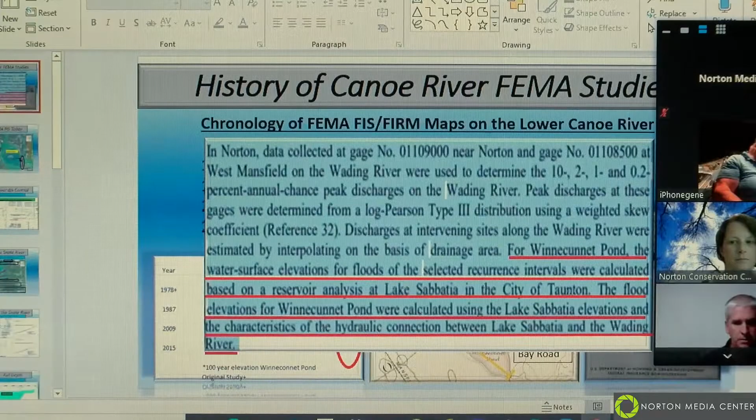Okay, can anybody see my screen yet? Yes. Yep. Okay, yeah, I've been living in Norton for 45 years. I'm retired. I started my professional career as a civil engineer in Boston, working with FEMA on the first flood insurance studies. After 25 years, I ended up with the National Weather Service in Norton, and I just retired a month and a half ago. Mark asked me to look at this, so I said, okay, let me look at the whole thing.

The first slide I'm looking at is a chronology of the lower Canoe River flood insurance mapping by FEMA from Bay Road up to Route 123. On your right here is a 1978 study done in 77 by Anderson Nichols in Boston. You'll find this on the internet. I had a copy of this along with a lot of other studies that were done back in the 70s. I was cleaning stuff out as I was retiring. I decided to keep this one. But if you look on the lower left here, 78 study, the Winneconnet 100-year elevation was 66.4 in the middle of the pond.

I have the update years, 1987, 2009, and 2015. There were no updates to the hydrology or the hydraulics from 78, but there was an update with the mapping and the datum change, 87, 2009, and 2015. So if you notice, there's a 7-foot increase in the 100-year elevation from 1978 study to the 87 study at Bay Road, Winneconnet, which goes all the way back at that elevation of 73.4.

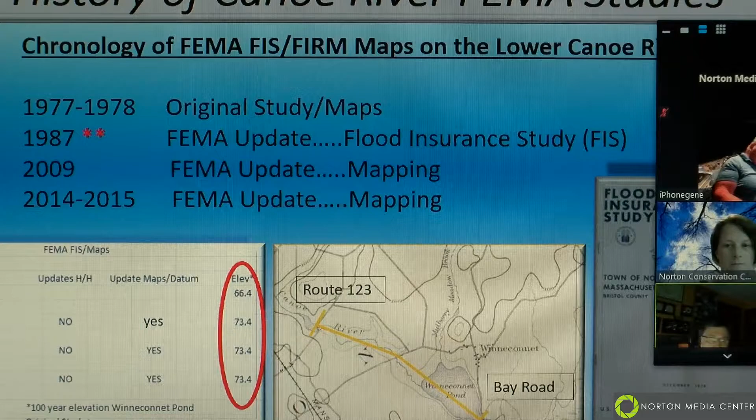So what I did is when I looked at this study in 87, it says for Winneconnet Pond, the water surface elevations for floods of the selected recurrence intervals, that's 10, 50, 100, and 500-year floods, was calculated based on a reservoir analysis of Lake Sabbatia and Winneconnet. What I found out is Lake Sabbatia rose 7 feet in the 1968 flood, which they called the 100-year flood, to almost elevation 66 down there. So it was a 7-foot rise.

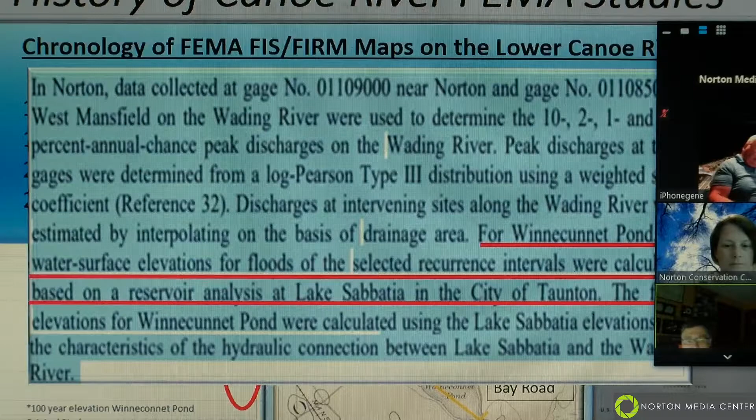I could not find any other information other than this. I tried to go to CDM and get the study in 87, but they couldn't find it. But the 7-foot rise there is similar to the 7-foot rise we have between the 78 study and the 87 study, from 66 to 73.4. So they're saying that there's a hydraulic connection between Sabbatia and Winneconnet.

I think what they meant was a hydrologic connection, because there's no hydraulic connection. There's Snake River, the Hockomock Swamp area downstream with Bay Road. So there's a hydraulic connection which is used in the flood insurance studies to date, right up till now, and I'll go over those.

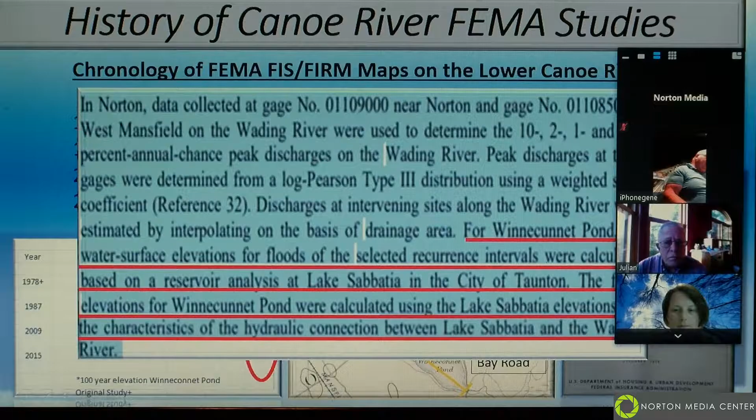This graph: when Mark came to me, I said, Mark, what you've got to do is get a profile of Bay Road, because the flood insurance study, the way it says today, has almost four football fields in length of water going over that road in the 100-year flood. So you've got to get me a survey of that road, plus other survey, and talk to some people there about the '55, '68, '98, 2005, and 2010 floods. See how high it went over the road.

So Mark did that, he got the survey, and I went to looking at the hydrology and hydraulics. So one area of concern here is the Bay Road culvert, because I could not find any hydraulic studies done on this culvert actually using the physical dimensions of it at all. I couldn't find it anywhere. It's not in any of the flood studies, because they started it there with a water surface elevation.

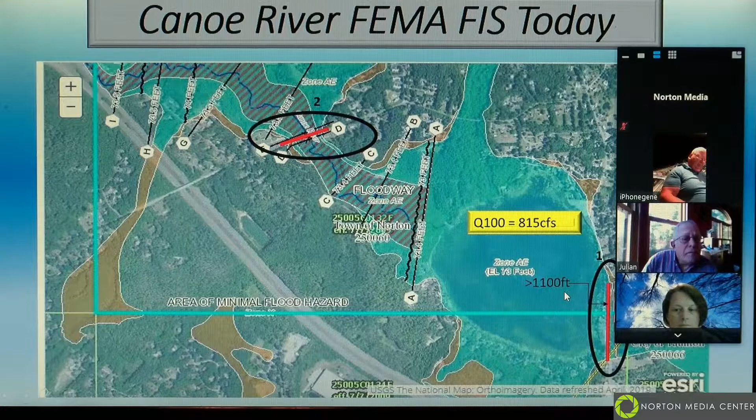And then the second thing is up here on Plain Street. There's a new culvert which can convey a lot more flow than the old one, the old triple culvert in there. So we had to look at that also as part of the study. So what I did is I went on a little bit of an investigation downstream, because I have to find out what's going on downstream to get myself a good starting water surface.

Snake River begins at the Bay Road. It goes down to Lake Sabbatia, and Mill River is downstream of Lake Sabbatia. So when I looked at the latest H&H studies, I went to MassDOT, and I got the I-495 study. And you can see here 66.7 is the NAVD 88 100-year elevation. And I went down to the new dam, because that's an even newer study in 2006 down in Sabbatia. 100-year elevation 64.9. You can see here in the graph, 64.9.

Interesting thing is the half PMF peak, 67 feet. Half PMF is from the half PMP, probable maximum precip, and in one day that's 17 inches. The full PMP is 33.5 inches of rain for that watershed. So the half PMP is 17 inches, and that gets the elevation to 67 feet. The reason why I'm looking at all this downstream is because that's such a flat basin. From Sabbatia spillway back to the Bay Road, there's no change in elevation, about 59.5, 60 feet. It's flat as anything. So I'm trying to figure out how we get a 7-foot rise in elevation of the 100-year flood from down that area.

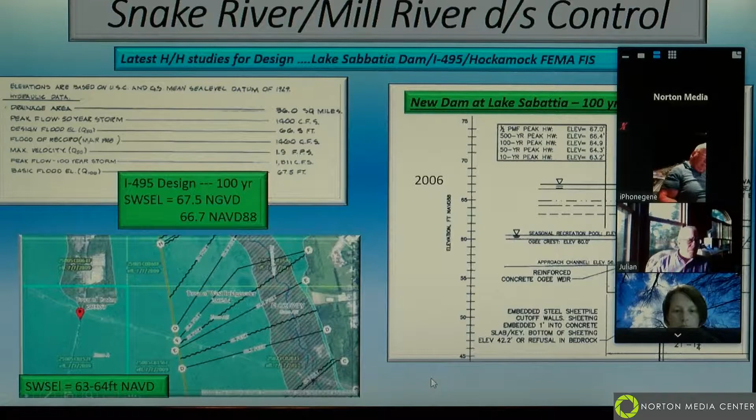And the other thing is, you go to Toad Island Road and you walk into the woods, into the Hockomock Swamp. You go northeast, east, and then you come out about 4 miles later at the Hockomock Brook, and that elevation for the 100-year is between 63 and 64 feet, which is the lower left. So investigating all these things, this is what I came up with. The new dam at the outlet of Sabbatia has 64.9 NAVD 100-year. FEMA 100-year, right here at Field Street, is 65 feet. The MassDOT 100-year is 66.7 NAVD.

This is how I started the HEC-RAS Corps of Engineers model. I started at 66.7 feet. And we got a bunch of cross sections through LIDAR and survey. And I'm trying to come up with how we got this elevation of 73.4 here, which is 7 feet over the previous elevation, and it's much higher than these elevations that are controlling downstream. And then the FEMA 100-year up here in Hockomock is 64. So we're in the 60s everywhere with the 100-year. I know I'm going through this quickly, but I also realize I don't have much time to do this.

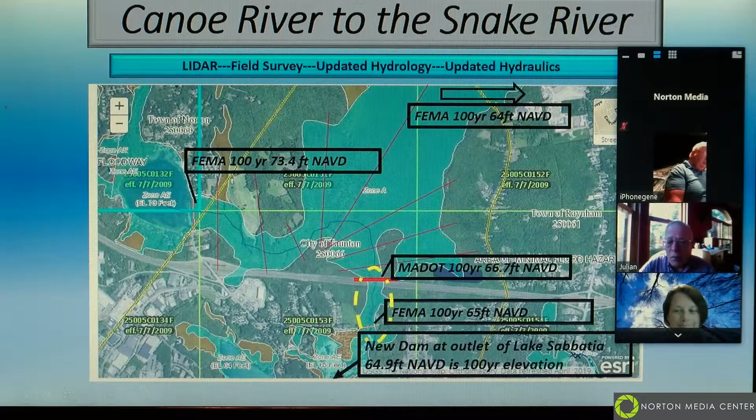So as we got LIDAR and field survey, we updated the hydrology and updated the hydraulics. The hydrology on the upper right: they used the Wading River peak flows for 1926 to 1977, using log Pearson Type 3. They took those flows and transposed them to the Canoe River Basin based on the difference in drainage area to the 0.72 power.

So because none of the studies updated any of this stuff, I used the new FEMA methodology, the multiple Grubbs-Beck statistical analysis, and I used 1926 to 2019 to come up with a flow. And the flow is bigger, which it should be, because there are some climate change issues with more rainfall falling. We also, in the lower middle here, had survey done on the bridge and the opening at Bay Road.

And then we also looked at the new culvert here on Plain Street, a little bit of drawing in. That's the new culvert, I did that kind of quick, but that's the new culvert as far as the conveyance. The old 3-barreled chamber, really you couldn't put too much in there. And if you looked at the flood study, you couldn't see how this thing was really working because you started with this 100-year elevation of 73.4, so this thing was always submerged.

But if you take it to the 66, you can look at how this culvert system would have worked, and it's not good at all, the old culverts. You would have been over top on the road in the 100-year. But now we've opened this thing up, so we got a bridge there, and it can convey a lot more water. So one of the reasons why I'm mentioning this is because anything upstream of Plain Street with the old bridge, you could have some flooding issues further up on Leonard, like in 2005, because this Plain Street was a real bottleneck also.

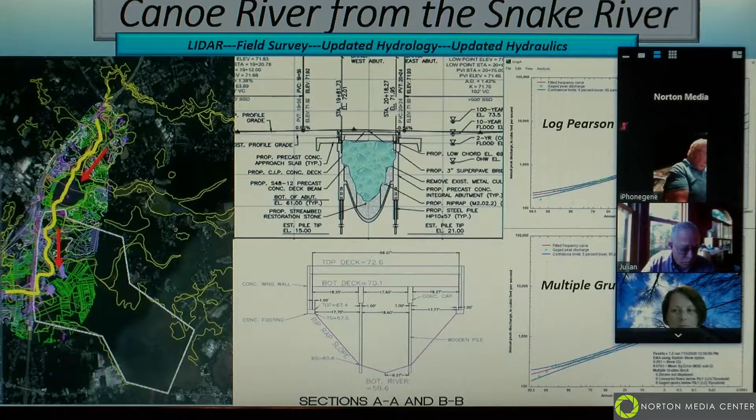So what I'm showing you here is the flood profile developed for the HEC-RAS model from I-495 up to almost 123 here on the right. And I used the 66.7 to start this at the 495 bridge 100-year. And we put cross sections in it, and we put the structures in, and ran the new hydrology based on FEMA's flood studies from the old hydrology, put the new hydrology.

And I didn't go over this, but this 100 is the new number, 871. The old numbers, which I skipped, were 815. That was the old 100-year number. Those numbers were even used in the Plain Street Bridge, but none of the hydrology has ever been updated. So I figured I'd update it to get some more realistic flows in here. The red line on the bottom is where no detailed FEMA hydraulic model was done from Bay Road downstream to the Hockomock Swamp into Snake River down to 495.

This line right here, that's the 100-year current line that's been there since '87, which is the legal line, which everybody has used because that's the FEMA line. That's the one that has to be used. But that's where it is. It's overtopping Bay Road. It's overtopping Plain Street. And when we did the hydraulics and the hydrology based on the new configuration here, we're coming up with a lower number. Very similar to the '78 study.

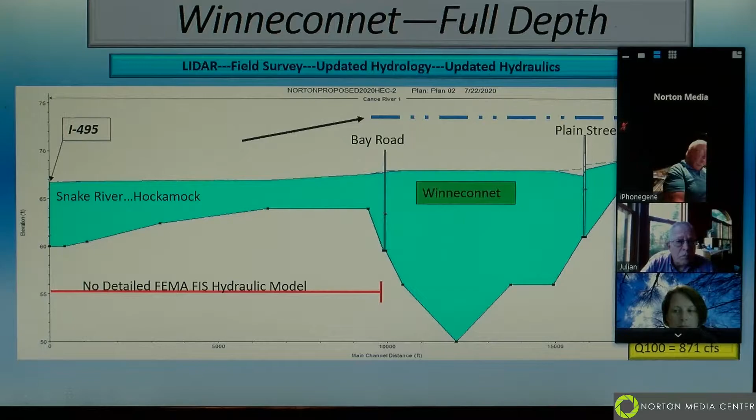So this map has a lot of information on it. But basically what I'm trying to do is I'm showing you the HEC-RAS profile of Bay Road. Over here on the left is I-495. Way up to the right is Chateau, but it's off the map. And I'm showing these storms, '55, '68, '98, 2005, 2010. They're the largest storms in the area in the modern time. They're the closest to the 100-year.

If you look at these flows transposed here on the left, these are the flows that were transposed from the Wading River annual peaks with drainage area to a power, converted to what the Canoe River would have for flows, according to the FEMA flood study in '78, which all these other flood studies have been based on. So I just updated it. But what we did is we used 871 for the 100-year. And the interesting thing is Canoe River had a gauge there. In 2010, they measured 800. It's close, but this other value is taken from another basin, the Wading River Basin next door.

So what I wanted to show you here is the blue line is where the HEC-RAS model comes, starting down at 66.7 at I-495. This is how high it comes, up to about 69 feet. And I'm showing this level, this is what it comes up to using the 871 100-year flood hydrology in the HEC-RAS model. I also went back and looked at 1998 because we are hearing that was a higher flood, and I'll show you why in a minute. But when we run that level, starting at 69 elevation down there at the bridge at 495, we come up and we overtop the road a little bit for a very small area.

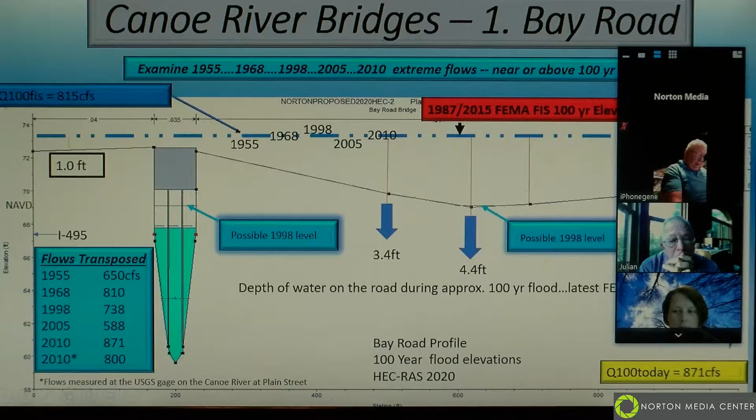So I wanted to tell you about the '98 flood because that was a unique flood that happened in June, and I call it the Great Flood of 1998 for the Canoe River. The basin here, we had nearly 10 inches of water, and I've kept a co-op site in Norton for 45 years, and I reanalyzed the data of that rainfall because I remember when that happened, that was a hell of a lot of rain. And we got 7.61 inches in 24 hours,

but it really fell in a much shorter time than that. So if we look at the TP40 Atlas for '98, when the TP40 Atlas was in vogue for this river, 1998 return period, the rainfall was all over the 100-year event. But if we look at the current Atlas, only the 6-hour and 12-hour rainfalls were near the 100-year event. The Wading River that this is compared to is just to the west or left of this drawing, so they didn't get the big-time rain.

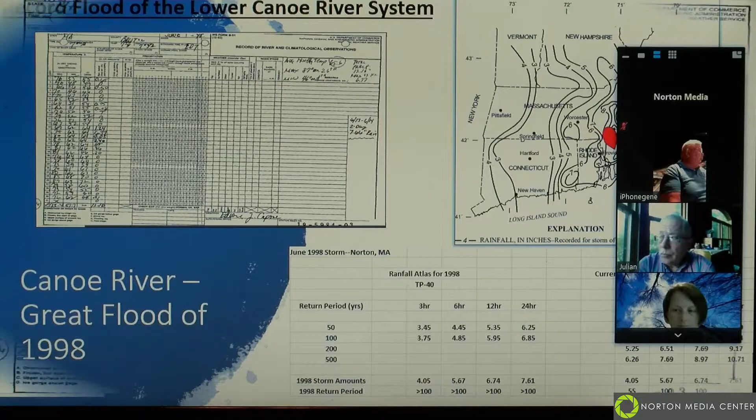So you know where you're going to transpose the flows that fell on the Canoe River from the Wading in that type of event, because this was a real tight gradient event, and it basically centered itself on the Canoe River. So I'm saying that was a greater than 100-year event, and I'll tell you why. 7.66 inches of rain in less than 24 hours. About the time when maximum flow got down to Winneconnet, which was probably 24 to 40 hours later, we got another 2.4 inches of rain.

So this is from data in the basin. I live in the east part of Norton, but I'm in the basin. So I get nearly 10 inches of rain in a little over 2 days. So it was quite an event. We understood from one of the presentations that there was a little bit of flow over the road in that event. So I reran the river system based on what I thought fell in the 1998 event.

I went to the Taunton Flood District's meeting notes, and they're saying that anything north of Field Street to the border of Norton, that whole Hockomock area, that is at or below 69 feet, there's an issue with it. And I couldn't talk to anybody to find out what the issue was, but it must be flooding. Anyway, I started the run down on I-495 at 69 feet. And sure enough, it came up through Bay Road, and it came up to the parking lot on, I used to call it Ann's Place, Chateau. The parking lot had water on it.

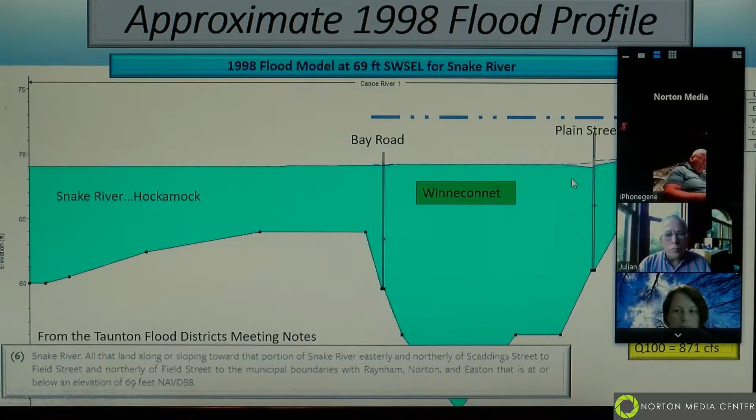And Plain Street with the hydraulics, it's running much better than it would have with the old hydraulic system and the bridge system. So when we go up to Plain Street, if we look at the 100-year 871 CFS with this hydraulic configuration of the new roadway, this is what it does. It keeps much of it under the low point of the bridge. The old 73.4, I don't care what you had in there for a bridge, you're going to be overtopping it. And that's what the flood insurance study says, and that's legally by law the 100-year floodplain.

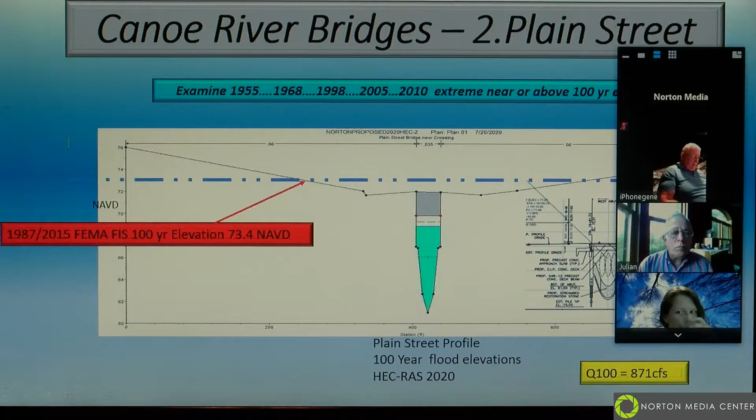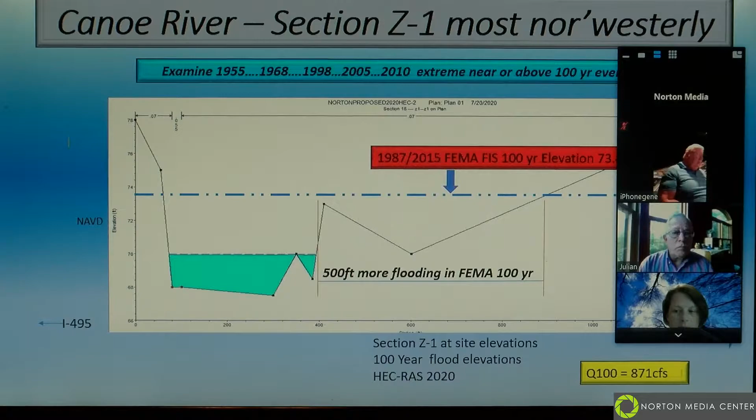And if you go up further, closer to 123, this is section Z1. Maybe you have this on a map, Mark, but this one here is changing the 100-year floodplain from 73.4 to about 70 feet NAVD, which changes laterally 500 feet of floodplain in that area. This is a major change in not only elevation, but also in the lateral extent. Oh, Mark, you want to talk about the map?

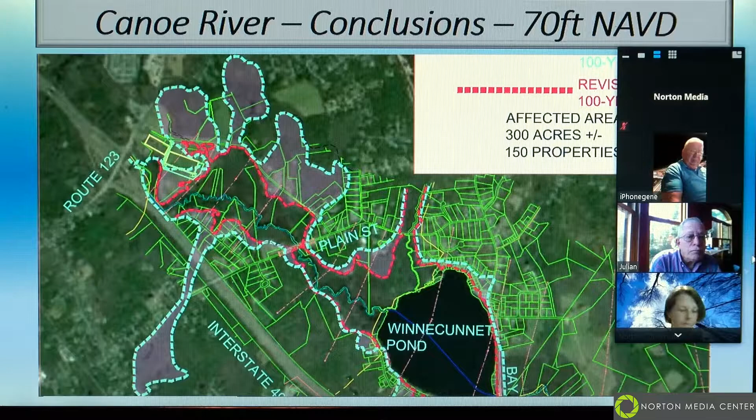Okay, go to the next one, so we'll go over the conclusions. The model you looked at has updated hydrology based on the earlier FEMA flood insurance studies up to 2019 with the peak flows. I used the Corps of Engineers HEC-2 model and retrieved that and converted it to HEC-RAS to make sure I had a good existing model and I had the flood insurance study correct with that.

Then we used a new HEC-RAS model because we had to extend the downstream down to the Snake River, down to 495 and maybe even further down. But it has new improved hydraulics at Plain Street, and it has the hydraulic modeling of Bay Road, which I haven't been able to find anywhere in any of the studies, or even outside of the studies. And I reviewed all the downstream hydraulic controls of the Snake River. And of course, we have this new profile.

The result is I have more water in the system than any of the other flood studies, and I have a lower floodplain by 3 to 3.4 feet for the 100-year. So if we were to go in front of FEMA, it's a long process. The letter of map revision and the conditional letter of map revision process and MT-2 application would have to go in front of them to show them the changes of the floodplains, the floodways, and all the elevations. And then they have this PMR, physical map revision, which we can get into later.

The one thing I didn't include is I-495 and Field Street hydraulics in the model. I kind of looked at the flatness of it, and I can't see how I'm going to get 7 feet, or how I'm going to fill that Hockomock Swamp up 7 feet more to get it up to 73.4.

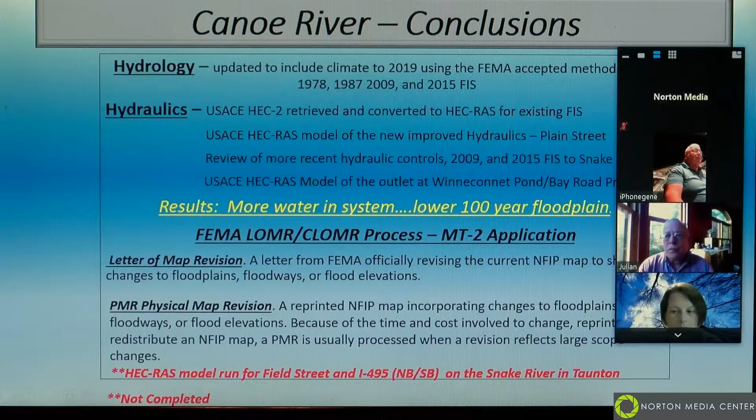So the MT-2, basically, it's a long process with FEMA. A technical review of the H&H is required. The FIRM and FIS have to be updated. The special flood hazard areas would change. It'd be a change in, I guess, requiring mandatory flood insurance, but anybody could still keep their flood insurance, and the maps would change.

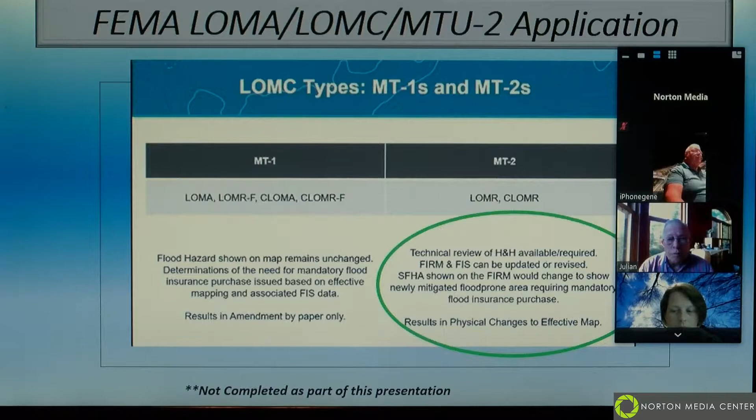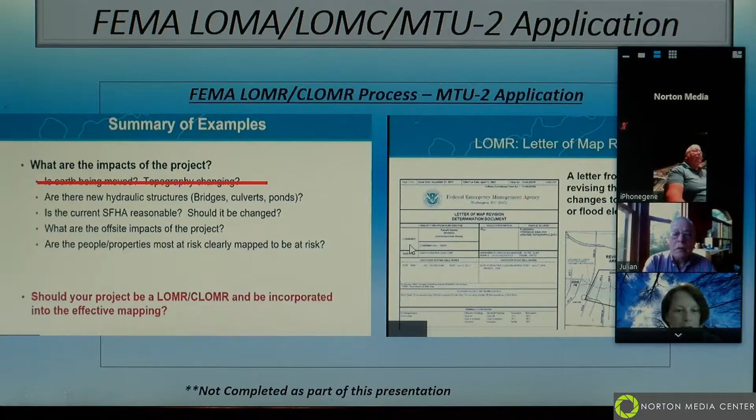All right. So if I was to submit something, there's an awful lot of information that still has to be done with floodplains and floodways, the way FEMA would like to look at it, so it would even have a chance of being accepted. But I have my certified floodplain manager's certificate I've had for 12 years. And the reason why I'm looking at this is FEMA is very happy to change mapping if they think something is wrong. No one's ever looked at this. No one's ever complained about it. I had Mark come up to me, so I said, oh, okay, I'll look at it, because he was telling me you don't think the water could be that high.

So this is not something FEMA would say we're not going to look at, because they want better mapping. If we can find a way with better technical information to give them better mapping, this is a start for it. That's all I did. This is a start for changing of mapping. The town of Norton does not have to do anything different with the FEMA regulations that are there now. This could take, I don't know, 6 months to 2 years to change, if it gets changed at all. So just showing you some information.

Well, as I mentioned at the presentation at the selectmen's meeting, this really is not something that can change our process until the map changes. So you're mentioning that it's a big package, but I'm assuming if you put this amount of information in front of them to show that there appears to have been a typo in the transcription between 78 and 87, that they will look at it and potentially fill in the missing pieces in order to make the revision.

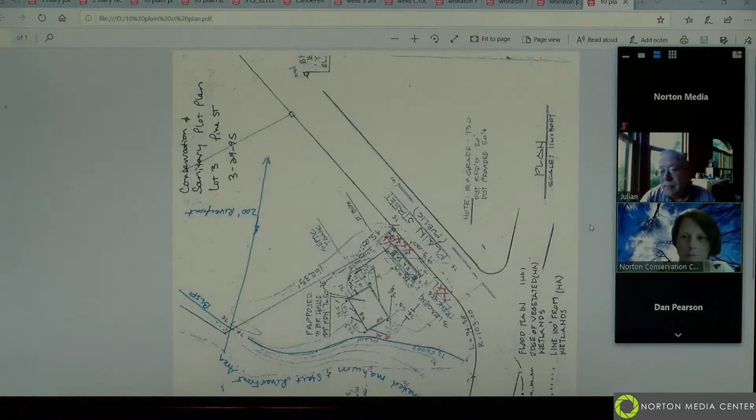Hi, good evening. This is Debbie and John Poplowski from 10 Plain Street. We are here tonight to get approval to have pine trees removed from our property, 18 in fact. All of them are old, but many have died. We've actually lost a couple in the last 6 to 8 months, the latest being just a week and a half ago, where it went right through our roof.

All right, just 1 second. Jennifer, is there any way you can enlarge that a little? I can enlarge it. I can't turn it sideways though. Is that better? Yeah. So up here is Plain Street, and this is Pine Street. I just drew X's in there. It's in that area, and I have some photos to show. I'm not sure if Deborah has anything else she wants to add before we look at the photos. No, I don't think so.

So there are 2 groups adjacent to the street, and then there's one couple that are adjacent to a creek back there. Is that right? A river. Well, Rumford River. It's far back. It would be the outer riparian, if anything. Yeah.

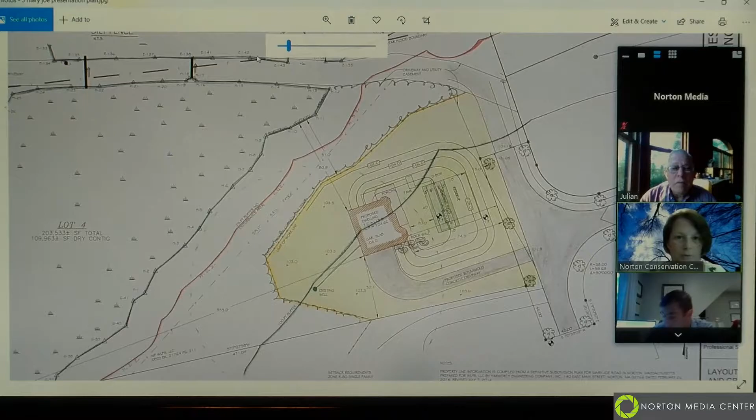I do have some photos if you want to see, for members. And while those are being posted, to take a minute, any other questions about the project from members of the commission? And if not, I'm going to look for hands up. Oh, I just had a quick question, Julian. Yeah. So you mentioned the silt fence is already there, was installed. What's the integrity of that silt fence, and how old is it? I just want to see if it's here. Okay. It's not bad. The fence is okay. Yep. Okay. So I'll just go back to the beginning here.

So this is as you come in the driveway from the road. You can see it's already cleared. And I think this is where the foundation will go, and up here is the septic system. This is full of Japanese knotweed. The sediment control in the front probably needs to be redone. And that is the existing well with the existing fence. And this is the post with an old marker, but it's not consistent with the markers that we give out. And it's not a post and rail fence.

Well, sorry, quick question. Will the post and rail fence go along the erosion control line? Correct. Okay. Yep. What about where it turns and is outside of the buffer zone? Would it stop at the 100-foot buffer zone? Or can it stop there? Let me see if I can pull that plan up again for you. What's this plan? You mean down here near the well? Yeah. Mm-hmm. That depends on what Natural Heritage says. But for our purposes, yes, unless Natural Heritage says it goes the whole length. Okay.

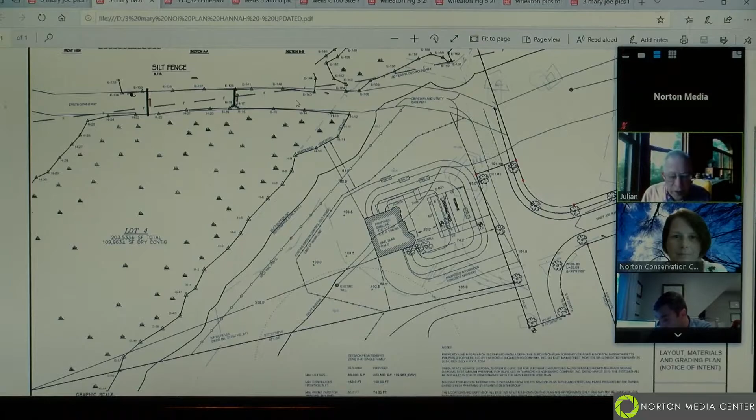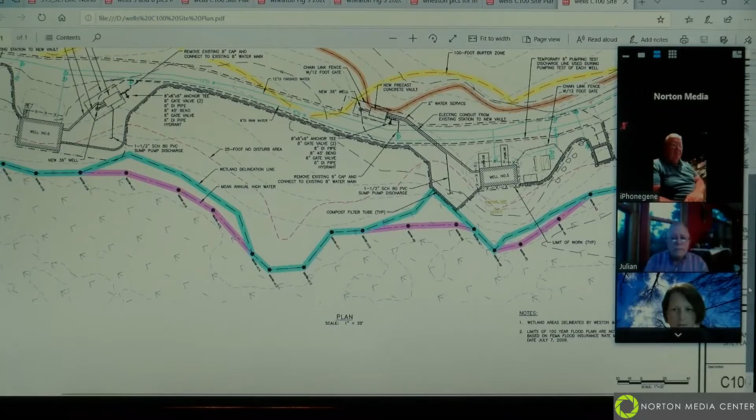Okay, the next question is, you've provided a detail in the narrative that's called the discharge detail. And then you provide a detail on the plan set that's a little different. Looks like it's supposed to be the same thing. So, could you just explain the difference between those two things? I'd have to see what you're talking about. Sorry. Okay. Well, you can have that answer for next time. The very last page of your narrative, Appendix H, discharge dissipation, has a discharge detail. That differs from the detail you're showing on the detail sheet. So if you could tell us what the difference is at the next hearing.

The next question I have is the sediment control. How come it doesn't wrap around the back side of those wells, or the north side of those wells, between the physical work and the resource area? It seems to stop at the fence, which is not even going to be there at that moment.

So what are you requesting? I'm asking you why the silt fence doesn't go behind the well. If the work is going to be performed there, that silt fence should be between the disturbance and the resource area. So why stop at the edge of the well? Well, is the well a building, a concrete block building or other? Are you talking about right here, Lisa? Yes. Yeah, it's a building.

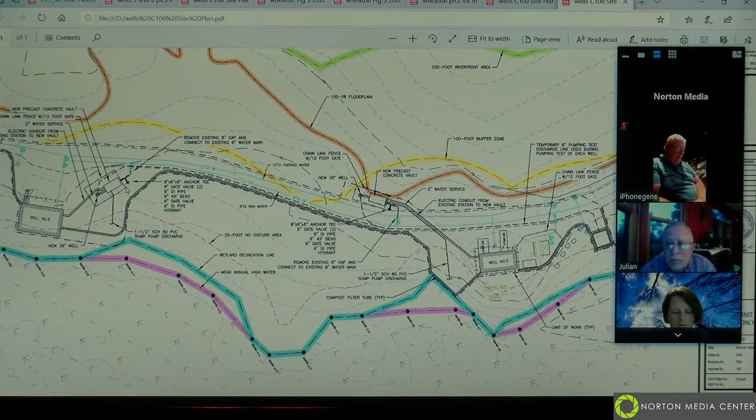So my question is, how often will that operate? If you need velocity dissipation in those locations, if you anticipate any erosion. So the purpose of that is, there'll be a vault in between the new well and the existing. The vault is subsurface. In the event water were to get into the hatch, it would basically have to be a 100-year flood event, it's a way to get water out of the vault. So it probably will never be used. Do you typically have any need for velocity dissipation?

No, we do not. Kevin, is there already a sump pump discharge from each of the wells here now? Because there's something discharging. To be honest, I don't know. That was not something I looked at when I was out there. I think there might be something there already. Oftentimes there's a basement in each of those well houses, so you can access the casing and the piping down below. So there may be a sump pump down there in the event that water gets in. Okay, those are my questions.

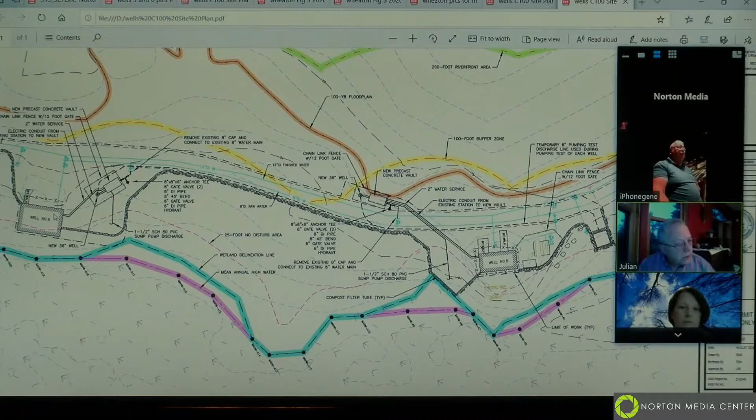All right, so I assume you wrote down that list of items to be added to the plan, and then I think we need to get a number, which should occur without a problem, for the next meeting. Our next meeting is, I believe, September 14th. Is that a reasonable time frame for you to have those revisions complete? Absolutely. Did you want to see a couple pictures real quick? Sure.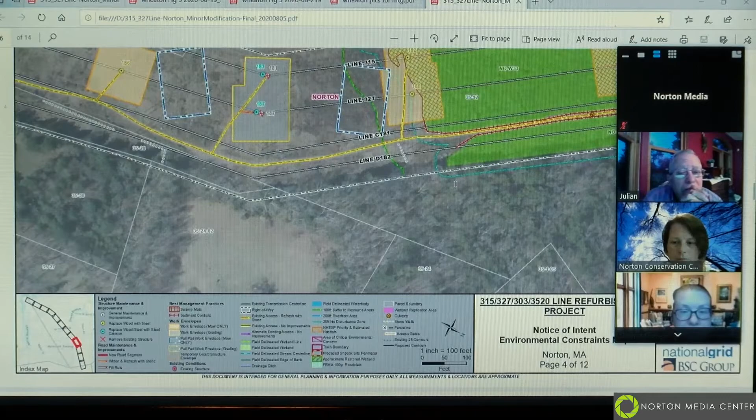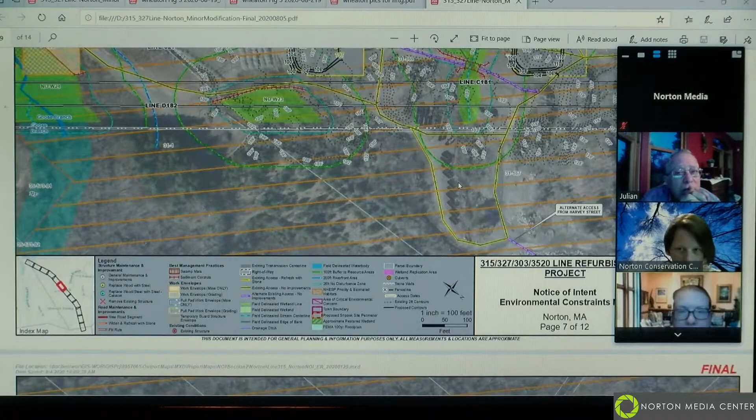So a similar situation, and that's at structure 189 and 183, where the existing access route is a hard right angle, and they're not able to make the swing with the larger equipment. So they've requested additional matting adjacent to the upland access route in order to get the equipment in. And the last location is page 11, and that's down near 202 and 209. Similar situation. The existing upland access route was too narrow with the constraints of the other transmission lines, so they requested additional matting next to the access route to make the swing in. So that's a summary of the requests at this time. I can take any questions or comments from the commission.

Allison did give us the revised notice of intent page, so because the order of conditions lists the specific quantity of BVW, we would have to amend it. But you could do an amended order. That's really the only change. But we can vote on that tonight and just produce the paperwork, correct? Because it is obviously needed for safety issues, and it's temporary, so I certainly have no objection to it.

Yeah, I don't either. I just had a question, Allison. So does the construction arm of National Grid usually opine on that stuff earlier in the process? Yes, so how we typically do it, they have a separate group, they're considered planners, and they go out with us in the field, usually while we're in the developing process of the project, and identify access and work setup. But it's not unusual that when the actual guys who are doing the work are in the field, they sometimes have some concerns or additional asks that do arise, and it's usually around safety concerns.

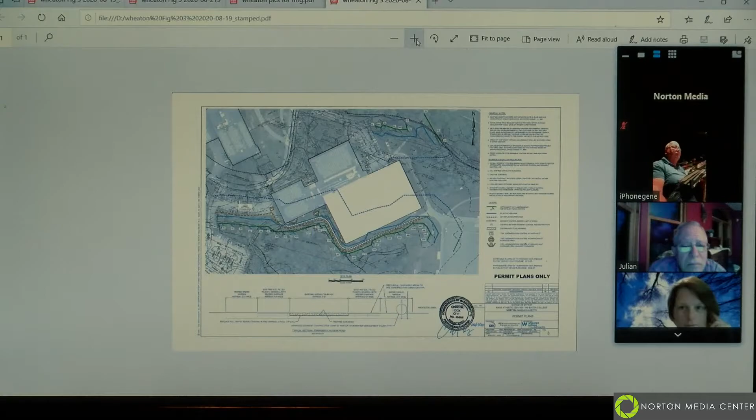Yep. Yeah, so I'm Anthony, and we're back after a continuance from last session. And since then, we've made several revisions based on the commission's recommendations from that last meeting, as well as from a site walk with Jennifer last Tuesday. And out of those, we were able to make some revisions, including, and if you could zoom in on the legend itself a little bit, please. So I'd just like to highlight the new symbology that we incorporated based on those requests.

So we have the wetland line in green, and you'll see the flags labeled in blue, and then the 25-foot no disturb zone is now a light blue. Yep. The 100-foot wetland buffer zone is in that dashed dark blue, navy, and the erosion control line is that dashed brown and white alternating symbology there. And right north of that, you'll see the road itself proposed to be rehabilitated in the crosshatched black and white.

We've also incorporated some new sedimentation control along the length of the road. We identified several stormwater outlets, yes, thank you, that we have surrounded with a few different types of erosion sediment control barriers. So you'll have that one there where the mouse is, where we'll basically just cut off around it to prevent any sedimentation coming from the work. We also have, working right to left there, one by the building that we'll surround with the same material, similar to the one next to that.

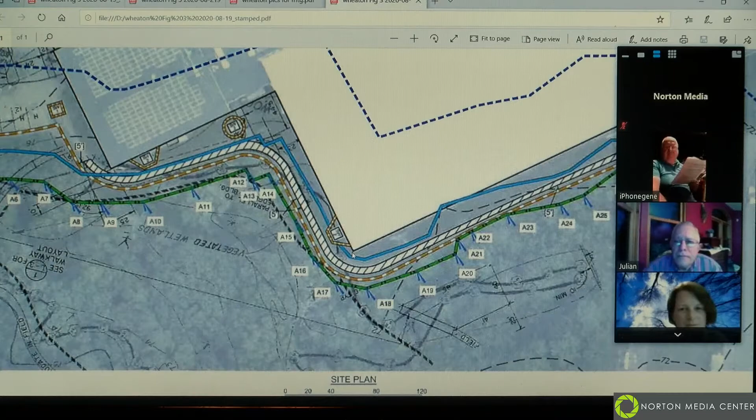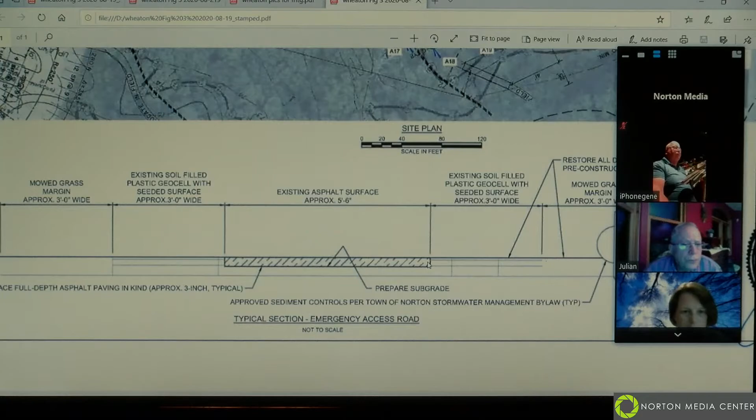And then I'd like to direct your attention down on the bottom to the cross section. So we have taken the requests from the last meeting and incorporated them into this cross section of the proposed work. You'll see in the dead center there, crosshatched, the existing road, which we'll be rehabilitating in kind without widening or increasing the depth. So you'll see notes there to that end. This is about 5 feet 6 inches wide, and on both sides of that, you'll see approximately a 3-foot wide plastic geocell, and that is remaining in place per the recommendation of the fire department. And if that is disturbed in any way during the proposed project, which we don't expect, but if it is, that will be replaced and fixed.

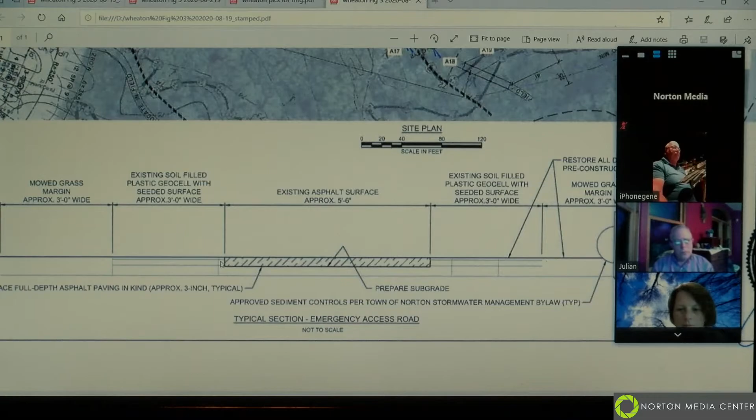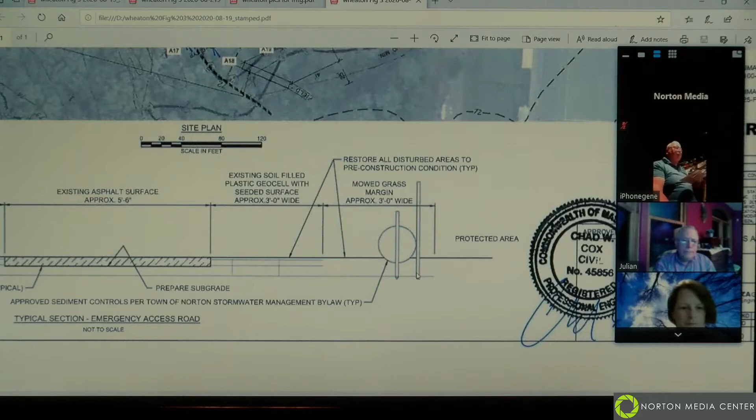And then working out towards the right to our protected area side, we have the sediment control installed there, the bio wattle. The client will most likely be selecting the bio wattle from the lists provided by the town, as well as the silt fence on the outside of that. If we want to jump over to figure 5 real quick, Jen, that has the details for those two. Take a second because I have to open it and then close it again, but one at a time, yeah. Hang on 1 second. Figure 5. Okay.

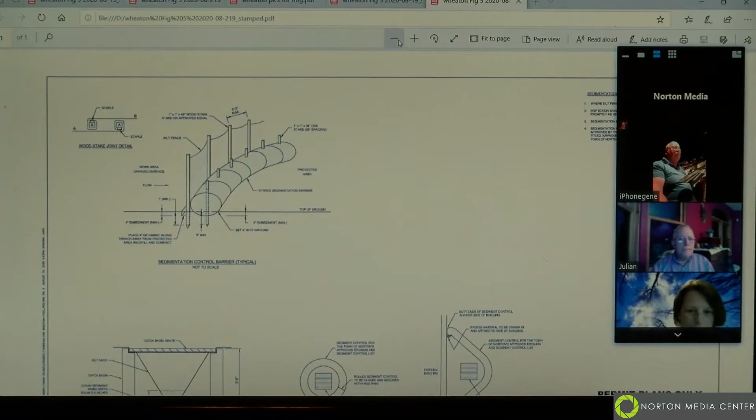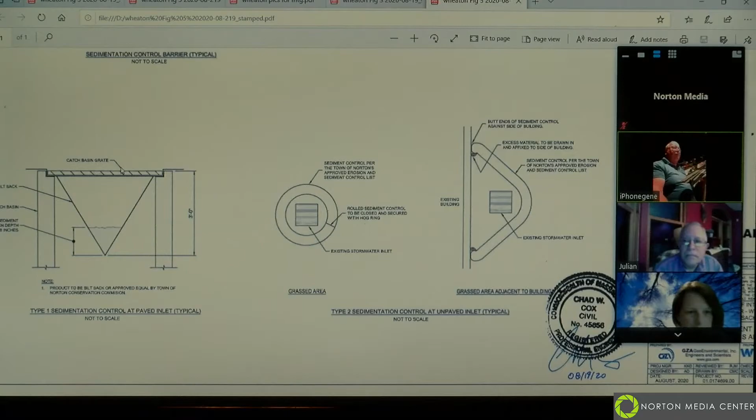Great, thank you. And so just to remind everyone of that proposed sedimentation control barrier, we have notes included there on the anticipated installation, and then moving down to the bottom, these 3 control details have been added since the last meeting. And so you'll see the corresponding details to those that I discussed in the other figure, where we'll surround those inlets with the sediment control barriers. And really the different one out of those 4 will be that far left, which you'll see in the parking lot where we're staging materials. So we'll be installing a silt sack inside that catch basin to catch sediment. If that reaches 8 inches at any time, it'll be cleaned out.

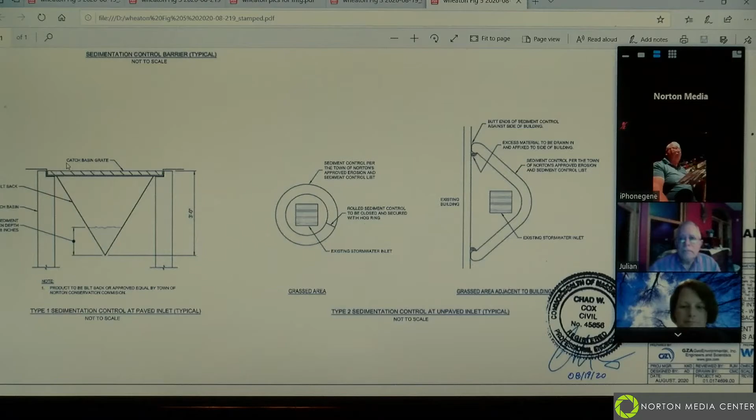And I believe that's it for those details. We can jump back for questions on figure 3. That'd be great. What would be your anticipated duration of the project? I'm told it's going to take about 3 days for all of it. They'll put in the control barrier first, and then about 3 days to pull the existing material. They'll keep that on site, mix that into the paver with some new material, and place that back down in about 3 days.

And so the removal, that requires the staging area, I assume. What requires what, sorry? The removal requires the staging area to store it temporarily until you, yeah. That'll be mostly for materials and equipment. They're hoping to basically mix that on site where it is in the road. If they need it, they have that parking lot to do that mixing, but yes, you're correct. And that's in parking lot 8 labeled on the plan.

Any other questions? No. So I assume we have enough information to consider closing. Is that a fair statement? Go ahead, Dan. Well, was there some question about abutters? Well, actually, isn't Wheaton College the only abutter? I'd have to look in their file to see that, but I don't believe we had any abutters here at the last meeting. Okay. Fine with me. Yeah, there were 2 abutters, but no, I don't think we had any. Oh, really?